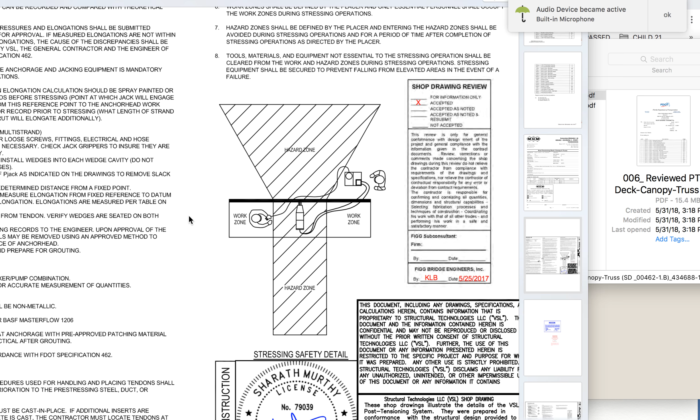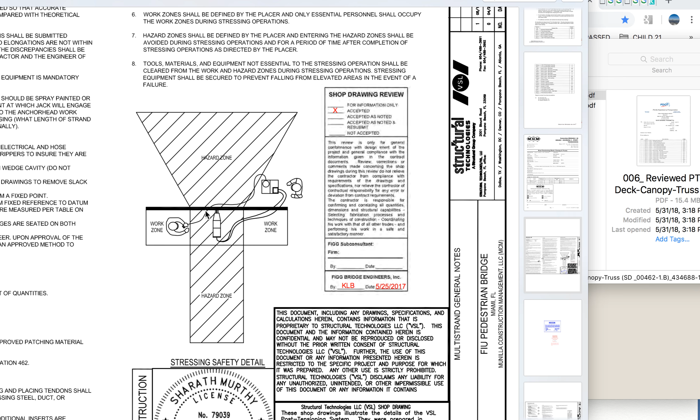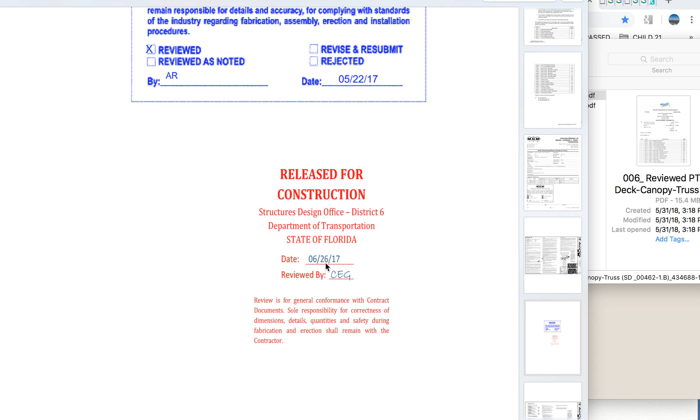Okay, one of my FOIA requests I got back just now shows that VSL Structural Technologies and also Florida Department of Transportation, here's dated May 19th, '17, knew that zone was not supposed to be occupied underneath the bridge while they were post-tensioning. In fact, as part of structures plans, which were approved by the release for construction, the Department of Transportation, State of Florida, on June 26, 2017.

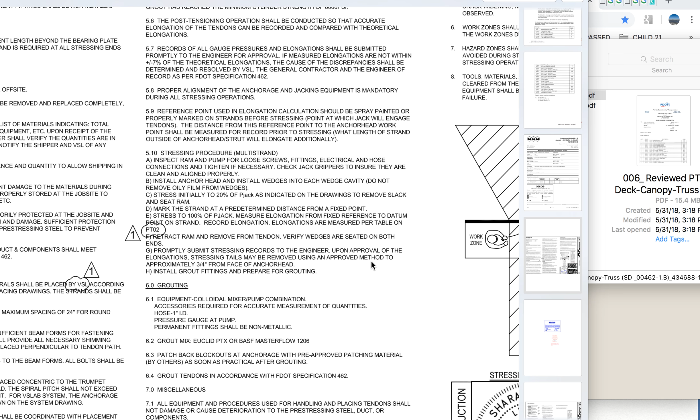And those plans make it very clear that, let's just zoom out a little bit here. Let me zoom out. Come on. It's a little delay in my screen recording and trying to make it do something here. Okay, looks like that's not going to happen. Here we go.

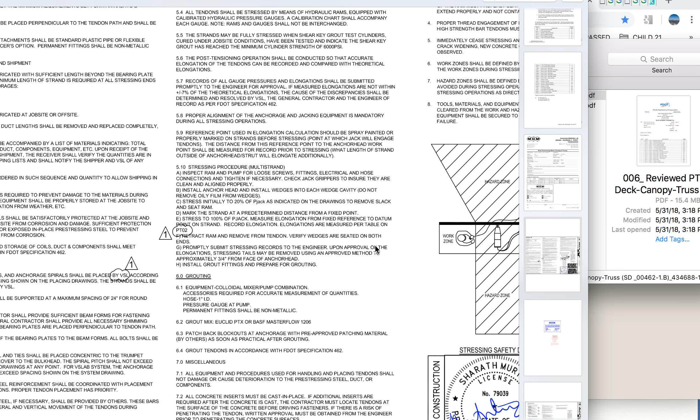So grouting, 100% needs to be done, and I'm going to have more in the video. But right now, as we go to stressing safety guidelines, let's just run right down to it. Immediately cease stressing and remove all personnel from the area if any existing crack widening, which they reported, new concrete cracking, and they did have new concrete cracking, bearing plate movement.

Well, we don't know about the bearing plates, that means it's loose, right? That's what we're going to assume, because obviously you're going to have some movement of the plate if you're tensioning. So this would, I guess, imply that it's loose or moved from position, from where you marked it off to know it moved. Or unusual sounds are observed. Immediately cease stressing.

Now you guys, quite a few have told me they heard a loud pop at one point before the failure, but we don't know what that is right then. But nevertheless, they had enough right there to immediately cease stressing operations. Work zones shall be defined by the placer, and only essential personnel shall occupy the work zones during stressing operations. Here are the work zones where you're outside of where the collapse would happen and kill you. And this would also mean traffic. People were not allowed to stop to be underneath the structure.

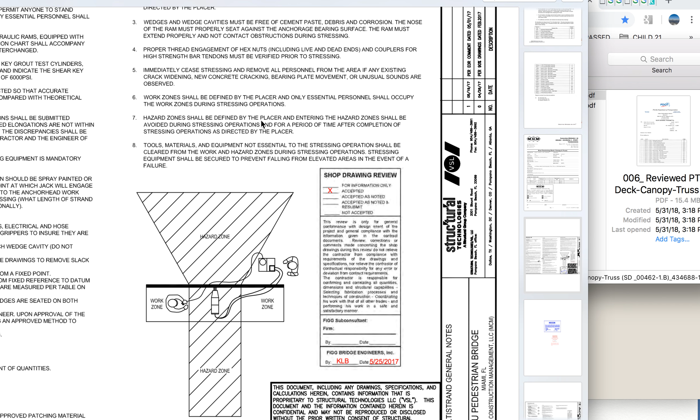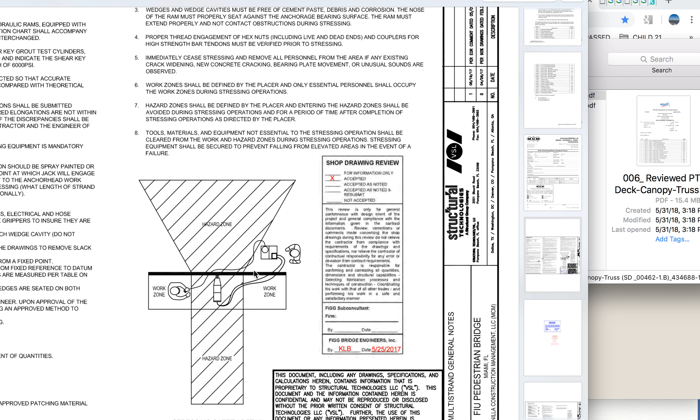Hazard zones shall be defined by the placer, right. Tools, materials, and equipment not essential to the stressing operation shall be cleared from the work and hazard zones. Well, they're not essential. People underneath, vehicles underneath the zone. Stressing equipment shall be secured to prevent falling from elevated areas in the event of failure. They did have a crane there that was supporting this. They had a man lift that I guess they were supposed to be operating off of, but they must have just decided that they were going to work on top of the structure instead.

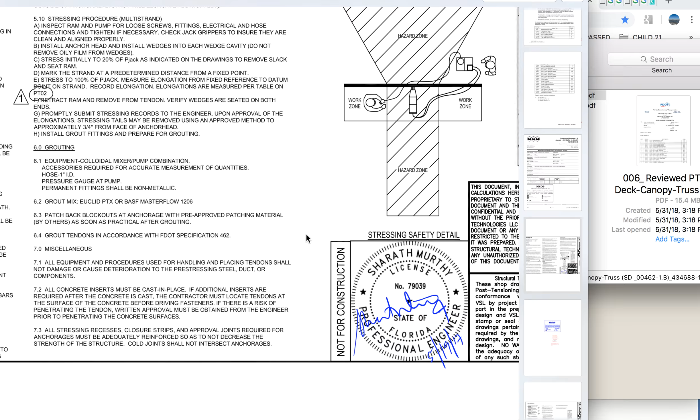So now this shows right there that they knew that was a hazardous area. They should not have been there. And this is just nasty. I've got more to share with this, but I just want to put this video out there real fast. Shows that the state of Florida knew about this. They knew it was a hazard. No one's coming down on this as knowing this. This is just clear. It's right in the plans that I got on a FOIA request. And you can't get any more clear than that was a hazard zone. That nothing should have been under it. That it met the requirements of cracking, further cracking, etc. It met all the requirements for shutting down the work immediately.